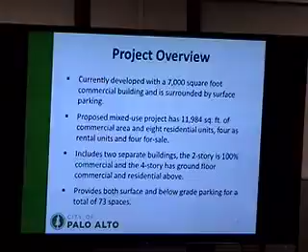So we have a mixed-use project here for 3225 El Camino Real. The site is currently developed with a retail building, 7,000 square feet, surrounded by a surface parking lot. The site currently doesn't have any vegetation or other amenities. The proposed project has an approximate 12,000 square foot area of commercial space, and includes 8 residential units: 4 rental units and 4 condominium units.

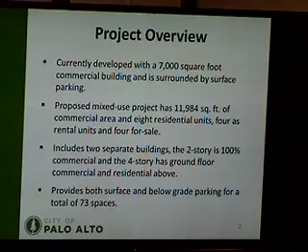The project has two separate buildings. There's a two-story building that is 100% commercial, with retail on the ground floor and office use above. The second, four-story building would have ground floor retail with residential units located above. The project provides both surface and below-grade parking for a total of 73 spaces, and includes a shared parking adjustment request for 3%, equivalent to 2 spaces, to provide 73 spaces instead of 75.

It also includes a design enhancement exception request for a 4% reduction to the El Camino Real build-to line. We'll get into details about that a little bit later. Also, this project is subject to the recently adopted interim ordinance that establishes a 50,000 square foot annual limit on office and R&D. The applicant wants to complete all of the planning requirements by the associated March 31st, 2016 deadline. So that's the goal.

The site and design review process is required for all projects that have more than 4 dwelling units. This review process starts with the Planning Commission and then goes to the Architectural Review Board, and then goes to City Council for final action. The recommendations will be forwarded to Council for consideration.

There are 4 site and design review findings that need to be made for the project. The first is to ensure construction and operation of the use in a manner that will be orderly, harmonious, and compatible with existing or potential uses of adjoining or nearby sites. The second is to ensure the desirability of investment or the conduct of business, research, or educational activities, or other authorized occupations in the same or adjacent areas.

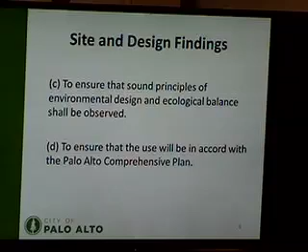For this particular project, we did an initial study and a mitigated negative declaration. The 30-day public review began on December 4th, so we're in the comment period right now, and that will end on January 8th, 2016. We added a few extra days to the comment period just because of the holidays. The identified potential impacts are associated with the protection of nesting birds and the development on contaminated soils. There are basically 2 mitigations, and those have been included in the conditions of approval for the project as well.

So there are 3 issues for this project: the parking adjustment request, the design enhancement exception, and the consistency with the South El Camino Real design guidelines.

For the parking reduction, based upon the project's joint use, the planning director can approve a parking adjustment for the shared parking facility for up to 20%. A 3% reduction is being requested to allow 73 spaces for the project instead of 75. The applicant did provide a parking analysis, and staff did review that very carefully, and staff does support this requested reduction.

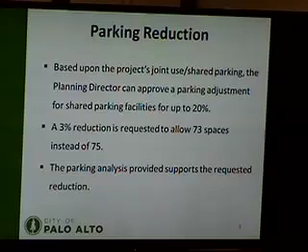The second is the design enhancement exception, and the DEE is not actually within the PTC's purview, but it's definitely here for you. I want to let you know about the details of this design enhancement exception.

The CS development standards require a 50% build-to line along El Camino Real, which would mean that 74.9 feet of the building mass is required to be placed at the build-to line along El Camino. The project is proposing a 46% build-to line, which is a 4.9 foot reduction to the mass. Staff supports the DEE because the central plaza is a key feature of this project, and shifting the buildings inward would make the plaza less desirable, both functionally and aesthetically.

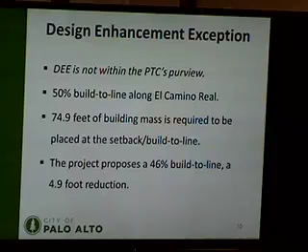So the project is generally consistent with the South El Camino Real design guidelines, but there are 2 elements of the project that could be developed a little bit further to make the project more complying, and that has to do with just the landscaping for the project and the details on the corner building. So the project will be reviewed by the ARB, and they will take a closer look at those elements of the project.

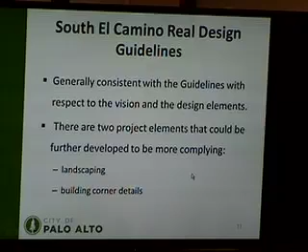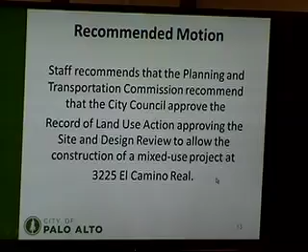So the next steps for the project: we're going to complete the public comment period for the MND, and then we're going to go to the ARB, tentatively scheduled for the end of January, and then also back to City Council for hopefully final review at the end of February. So in conclusion, staff recommends that the Planning and Transportation Commission recommend that the City Council approve the record of land use action, approving the site and design review to allow the construction of a mixed-use project at 3225 El Camino Real. Thank you.

So does the applicant have a presentation? Yes, we just need to hook him up. Okay. So we have... yes. You want to share? Yeah, would that be okay? That's fine. Yeah, sure. I have nothing right now.

I like the new venue. Cozy. I'm going to slide around.

So how much time did you need? Just about 10 minutes, maybe 11, depends how fast I go. That's okay? That's fine. Okay, that should be good.

Let's see, that's once I get... don't start the clock yet. That's once I have it set.

Gotta clean that dust up. I was hoping you wouldn't see that. So this is on, I take it?

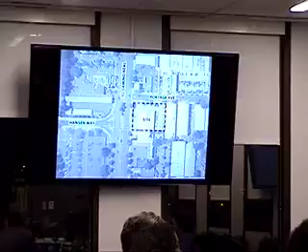The site is approximately 30,000 square feet, on the corner of Portage and El Camino. It's the current site of the Foot Locker. One of the unique things about the site is that Hansen Way terminates basically on an axis to the site, and we've taken advantage of that in our proposal. The site is surrounded by primarily CS zone properties.

Some street views - I think we're all familiar with the Foot Locker - this is looking from El Camino south, from El Camino north, and this is down Portage, looking at the side of the building.

The program for the project is to create a new 4-story mixed-use commercial building with 4 two-bedroom apartments, about 1,350 square feet, and 4 four-bedroom townhouse-style condos, about just over 2,100 square feet.

We want to respond to the nature of the site, park the project primarily in the subterranean garage, provide enjoyable living and working spaces that enhance the pedestrian experience, reinforce the edges along El Camino and Portage, and support sustainable systems.

We've been at this for a couple years. Two years ago, in October 2013, we had a preliminary ARB hearing, and the project went on a hiatus. Then last week, we had an ARB, sort of an informal reintroduction to the project.

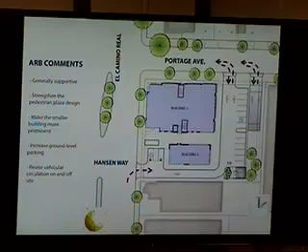We had a couple access points on Portage Avenue; those have all been reduced to one, and you'll see that in the revised site plan. They thought we should increase the ground floor parking because there is a large retail component going back in, and then revise the vehicular circulation like I just described.

Last week they talked about really enhancing the landscaping, making the plaza a special place, and they had some minor comments on architectural elements.

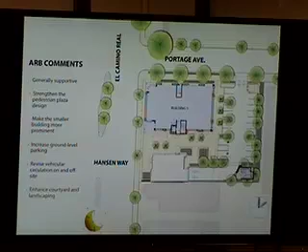So this is the site plan we're proposing. We're reinforcing the corner with the main building - it's a 4-story building. We have the second building; we've moved it forward and south on the property. It starts to define the edge of the project.

We have a terminus for Hansen Way, which will be an outdoor courtyard space that's actually wider at the front than it necks down. It connects the parking to the building entries.

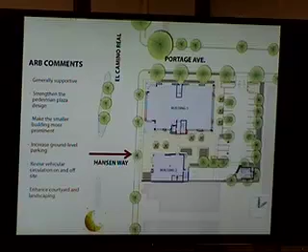There's the plaza. This is a building you can circulate all around - lots of connectivity to pass through the site, around the site, all the time seeing lots of storefront windows.

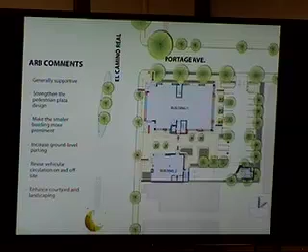There's a bus stop right there in front, so there'll be some synergy with the plaza and the bus stop. These are building entry points - entering on the corner of the corner building, the two corners, as well as off the plaza and the rear area of the building. Then the smaller building has multiple entries as well.

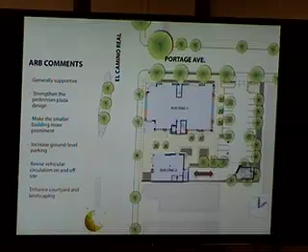And then the one ingress and egress, as I said, off of Portage, and we've moved the access to the parking garage into this sort of hidden corner or edge of the site where that big fat arrow is, and that's the access in and out of the underground garage.

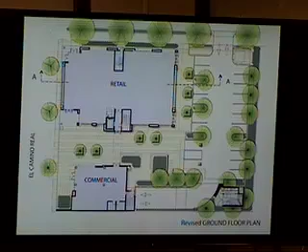A little bit larger scale, I just want to walk you through the plans of the building. The courtyard has the main building entrances off of that courtyard to reinforce it. An elevator feeds the garage below and the building above, as well as a stairwell at that location. We have seating opportunities in the plaza.

Going up through the building, the residential units are planned around an outside, open-to-the-air courtyard. I don't like the idea of a double-loaded corridor going to a living unit, so this is open, meaning fresh air can circulate through. There'll be furniture, that sort of thing, out in that space.

All the entries feed off of that courtyard into the 4 units at this level. On the perimeters are their outdoor balconies, and they can look in 2 directions from each balcony.

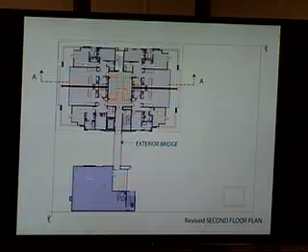The office portion of the project is located in the smaller building to the south, but connected with an exterior bridge that adds some excitement in the courtyard space and some 3-dimensional quality to it.

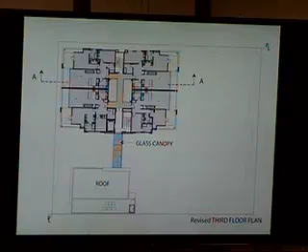This is the level of the condo townhomes, the 3rd level. You see the courtyard again in the center, allowing for access and cross ventilation through the units. And you see the roof of the canopy, covered with a building integrated photovoltaic panel system to provide weather protection, which we use later on as well.

This is the 2nd floor of the townhouses, planned around a 2-story open space: living room, dining room, kitchen, the big white area with the X in it in each of the 3 units. Then you have a study and a couple bedrooms at this level, and there were a couple bedrooms at the level below as well.

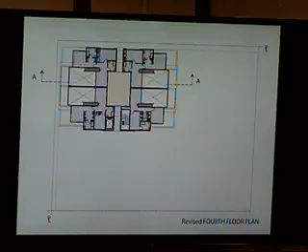At the roof level, the top of the skylight, or the courtyard, is capped by a photovoltaic panel that provides protection and also helps generate some power, primarily to light the underground garage. That's a glass PV panel system, a laminated product — it lets sunlight in and you can see through it. We thought that would be a really interesting feature to cap that space.

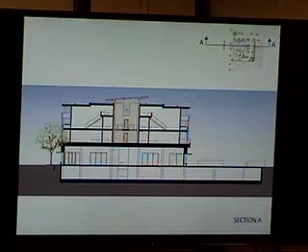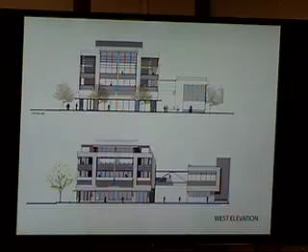You can see the people on the balconies — they have balconies on the 2nd and 3rd floor for the residential units. The ground floor is all primarily glass for the retail.

The Portage elevation before, and the proposed at the bottom. You can see we've developed it with a little more detail, and you can see how the materials interrelate with one another — it's a nice symmetrical composition.

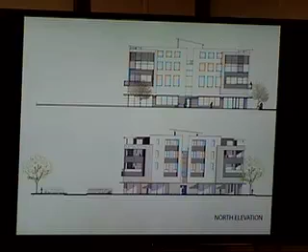Again, ground floor, some landscaping, and retail window glass, and the entrance there goes into a stair element that takes you down into the garage or up into the upper floors. The area below the angled roof is open to the sky or to the air.

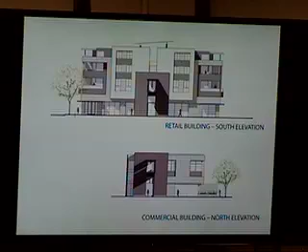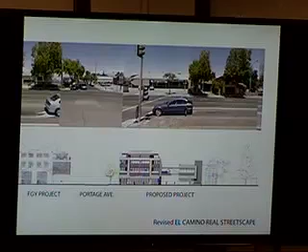The building on the left apparently is not, at least at this time, moving forward. You can see how our building relates to that and anchors the corner, yet it steps down to the building just to the south of us, which is also a small mixed-use building. We've always felt like we should provide a transition there up to the corner, and it's reinforced by providing this void outdoor courtyard between, with the bridge that connects the two.

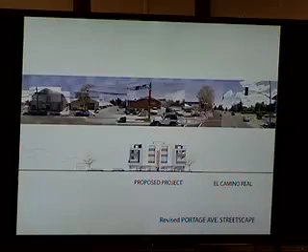This is the Portage elevation, and the building on the far left has recently been remodeled and lifted up, so it's a two-story building now. I imagine this composition will be like this for years to come. Obviously we're not showing all the trees in these elevations—we want you to see what's behind the trees—but there is a ribbon of trees.

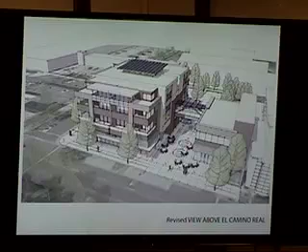This three-story, three-dimensional view is what we used for the design. It shows the courtyard and how the buildings relate to one another. You see the photovoltaic panel up on top of the building there, and the various balconies.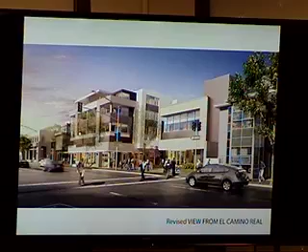And then some more refined images of the building from the south, looking north on El Camino, and from the north looking south along El Camino. And I believe that's the presentation. So thank you very much.

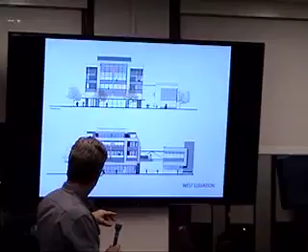We're good. Ken Hayes. So to answer your question, this facade here is on the build-to line, and these balconies here project about 2.5 feet out. This is pushed back about a foot to 18 inches here to allow for this planter. This main element, though, is essentially on the build-to line. Okay, thank you for the clarification.

So this was about the build-to line—pretty much done along the old zoning code. There's one thing I'd like to raise, which, as Kara argued, may not be within our purview. But it is within the purview of this commission to do the planning for El Camino, and we discussed the Grand Boulevard initiative for El Camino. So when I think about this, in relation to the variance being proposed of 4.9 feet, nearly 2 meters...

With all respect, I think you have it backward, because when I think about El Camino and the Portage Avenue, I'd say the main facade, the main emphasis point, should be along El Camino. For this reason, I'd welcome a broader or wider facade along El Camino, not a reduction there, but maybe a reduction on the other side, which is less important from El Camino's perspective. If it's not in our purview, it's not, but I hope this discussion continues at the ARB and before the City Council, because it's important. From this perspective, if I were part of the ARB, I would not recommend this exemption of an additional 4.5 feet, because it goes against the Grand Boulevard initiative.

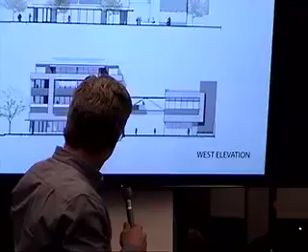So because we felt so strongly about trying to create linkages throughout the community, and in particular this project with Hanson—the energy from Hanson Way terminating somewhere—we wanted to create this outdoor space here. We brought out this 3.5-foot tall planter, about 14 feet long, that is on the build-to line. So we thought we were in compliance.

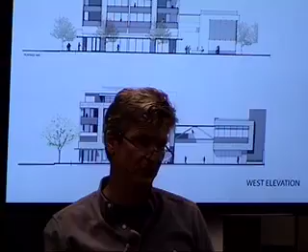When you add up the width of this and the width of this, reinforcing that street edge, we're like 10 feet more than we need for the build-to line. So there's a difference of opinion, I guess, between how this definition is interpreted. Right, no, I understand. But the planter doesn't have that much of the spatial value as the facade of the building.

So the main artery of Palo Alto and the Peninsula is El Camino. If this was somebody else's project, and I just showed you those two elevations, you would probably select the other one, along Portage, as more representative and adequate for El Camino. And when I look at this west elevation on the screen right now, this looks to me as a side elevation, not a front elevation. So from the public space interest, I think the elevation along Portage should be along El Camino, and this one should be along Portage.

Okay, thank you. Commissioner Rosenblum?

Just to keep the commission on point — to Commissioner Gardias' point that this is unusual and outside our purview, I don't think it's unusual. Our purview is to think about an ordinance that affects all buildings, but not about a specific building, which is within the ARB's purview. So I don't find that inconsistent. Second, even if it were, the thing we're supposed to look at — the design exception allows for minor exceptions of a certain type, and from 74.8, I think, to 70 plus, they have this additional planter element. Even if it were our purview, this fulfills the criteria required for design exceptions. But for the purpose of keeping the commission on track, I understand why this is outside our purview — it makes sense that we focus on the ordinance but not on every individual review.

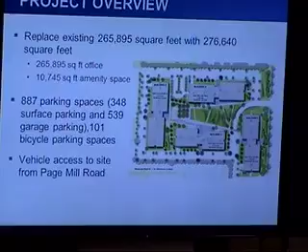They're in 4 buildings, and we've put over 50% of the parking underground in order to create a really great green space that's about the size of 2 football fields.

We have PVs going across all 4 buildings' rooftops, and a lot of other great LEED features, including EV charging stations. We have over 32 EV charging stations, which exceeds the LEED requirements.

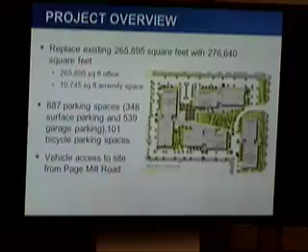I want to talk about a couple of the high-level issues. Tonight's main focus will be on the EIR. Historically, replacement projects such as this have actually only been subject to a negative declaration or a mitigated negative declaration.

But in our instance, staff was concerned about the traffic impacts, in particular because we had worked with the neighborhood, College Terrace, to address their number one issue, which was traffic onto California Avenue.

In this instance, we voluntarily worked to close off access from our property onto California Avenue, so all of the traffic flows on and off of Page Mill Road. Because of that traffic implication, we went through an EIR with a focus on the traffic impacts.

Even relating to our EIR, I'd like to point out that our EIR analysis actually looks at a more conservative project than this.

It looks at a bigger project at 285,000 square feet, while our proposed project is actually only at 276,000 square feet. And even with a higher, more conservative analysis, city consultants and the EIR consultants

have concluded that this project does not result in any significant impact, either traffic or any other CEQA-related impacts.

Relating to our project, the existing buildings were compliant buildings that were built in phases between 1961 and 1980. These projects were legally permitted and went through all the approval process at the time.

We actually did some research, and we believe that according to city records, there weren't FAR requirements in the research park prior to 1979. So again, there should be no doubt that these buildings were in compliance prior to that.

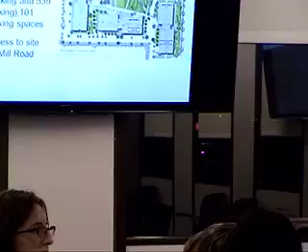Thank you. My name is Lenore Symes, and I've lived in Palo Alto for 48 years. So I've been around and watched this town change enormously.

I can't speak to the health hazards, but I can speak to what it's like to work with Sandhill. I live over by Edgewood Plaza, and I've been involved in that project since day one, well over a decade since this has been going on. I remember very clearly, and thought this was weird, there were two people who showed up at that very first meeting from either Cupertino or Sunnyvale, a long time ago, who got up to speak because they were so frustrated and upset with how Sandhill did not keep the obligations they made to the community, how they would not talk to them, how difficult they were to work with. And I feel like, oh, it's my turn now.

Sandhill was difficult to work with from the beginning. As part of the project at Edgewood Plaza, they got permission to build 10 houses, which all were sold for over $3 million, and in exchange, they got parking and houses. Parking was taken away, I should say. In exchange, Sandhill's agreement was to give that Edgewood Shopping Center a supermarket forever and always, as long as they owned it. Two neighborhoods lost lots of parking, and we don't have a grocery store.

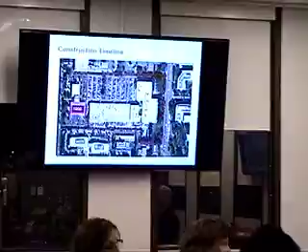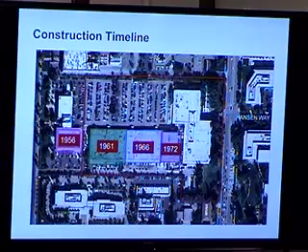The first building was on the California Avenue side. In '61, we start building towards Page Mill. In '66, we get the middle building. In '72, a little bit more fills in that entire middle building. Then in 1980, the front building on Page Mill Road gets permits and starts to be constructed.

That's probably one of the most critical factors—this front building on Page Mill Road was built prior to 1989, which is the cutoff for when you can do this FAR replacement everyone's been talking about. Also at this time, the leasehold area was this larger site—you see the red outline and the blue outline. The lease area at the time was both of those, going from Page Mill Road to California Avenue.

If you look at that larger site and all the colored buildings there, you come to a 39% floor area ratio. So at this point in history, the parcel was in conformance with our standards.

Was there an FAR in 1980? Yes, the applicant said there was. Not—it's been 40% for some time. The note was there's no FAR prior to April of 1979. Oh, thank you. So in the 1980s, everything is in conformance with the code.

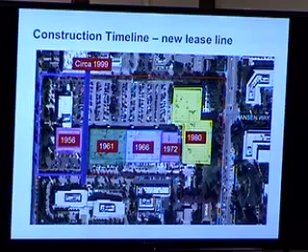Somewhere in '99, as was stated, commercial lease lines don't have to go through a subdivision process, and so at some point this new lease line happens. That's when we have an application for a new building on the California Avenue side. At that time, as best we can tell, city staff was just looking at the smaller parcel, and all they saw was one 1956 building, so it looked like there was more capacity. They allowed this 2000 building to happen.

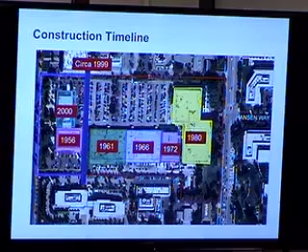After all of that is constructed, on the California Avenue side you have 40% FAR, but then because of the new lease line on the Page Mill side, you have 44% FAR, and that's how we come to where we are today.

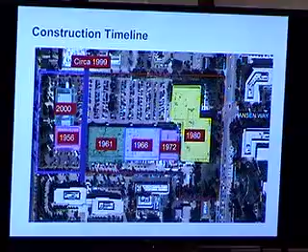So 44%—are those all, is this only the lot in consideration, or both lots? 44% is the red parcel, which is the project site we're talking about tonight. 44.69%.

Before you leave this discussion—how does the 44% represent 276,640 square feet? Approximately, yes. Do you by any chance know what the percentage will be once it's replaced with this existing—excuse me? The percentage is exactly the same. They're building back the same FAR. We do have the extra 10,000 square feet of amenity space, but that's not counted towards FAR.

Thanks for clarifying. Can I ask a clarifying question? Relative to this leasehold split that occurred in 1999, I've heard from some members of the public who believe some kind of city review was required for that split. This is a question for you, Cara—was a city review required, and did that take place?